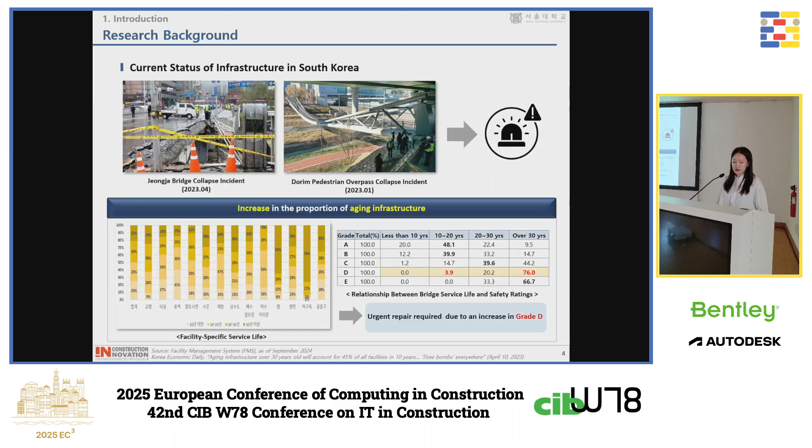As infrastructure continues to age, it is essential to understand how many facilities can be repaired within a limited budget and how much each repair will cost. However, in Korea, facilities are managed separately by different authorities and related records are fragmented. As a result, the FMS lacks a comprehensive repair cost database, making current budget estimation rough and unreliable.

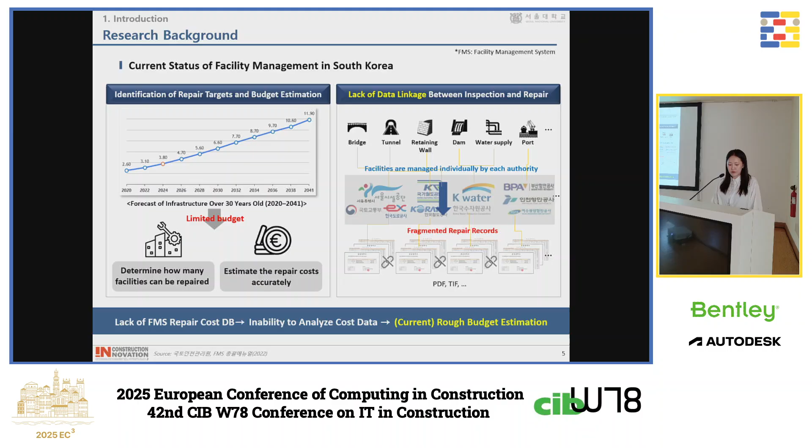To address these challenges, our research proposed three main objectives. First, we aim to establish a structured database dedicated to repair cost analysis. Second, we develop a unit cost estimation model using actual maintenance records. Finally, we aim to support accurate estimation of repair cost.

Ultimately, by improving the estimation of maintenance and repair costs, we can ensure the efficient allocation of limited public budget and contribute to the safe and sustainable management of social infrastructure.

This slide shows the overall research framework. First, we define a facility breakdown structure based on the Korea Special Act. Next, we build a database using repair records and inspection reports, linking cost and condition data. Then we develop a unit cost estimation model using the XGBoost algorithm. The model predicts cost based on facility characteristics. This approach supports more accurate and scalable cost estimation for infrastructure maintenance.

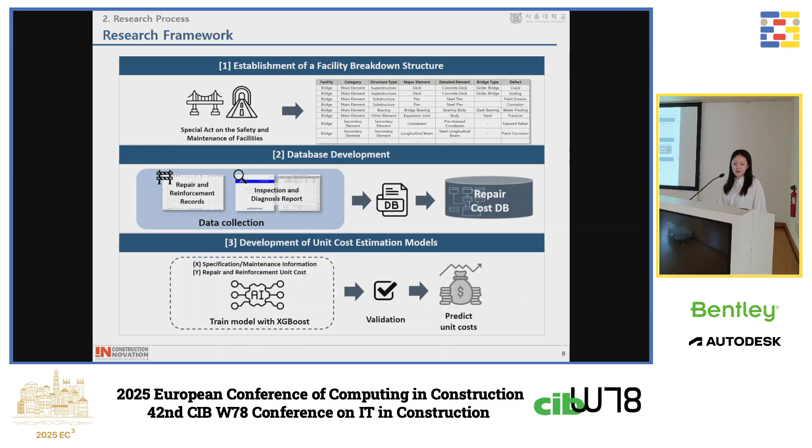Now let me explain the first step of our research framework: the establishment of a facility breakdown structure to standardize data collection. In South Korea, the Special Act on the Safety and Maintenance of Facilities classifies public infrastructure into 15 types, such as bridges, tunnels, dams, ports, and more. We select target facility types from this legal classification and examine their inspection and repair obligations. Next, we define data collection criteria based on this.

At the bottom of the slide, you can see an example of our breakdown structure. We structured the data hierarchically, starting from facility type, then category, structure type, major element, detail element, elemental type, and finally the type of defect. This breakdown system ensures the data is collected in a consistent, detailed, and comparable format.

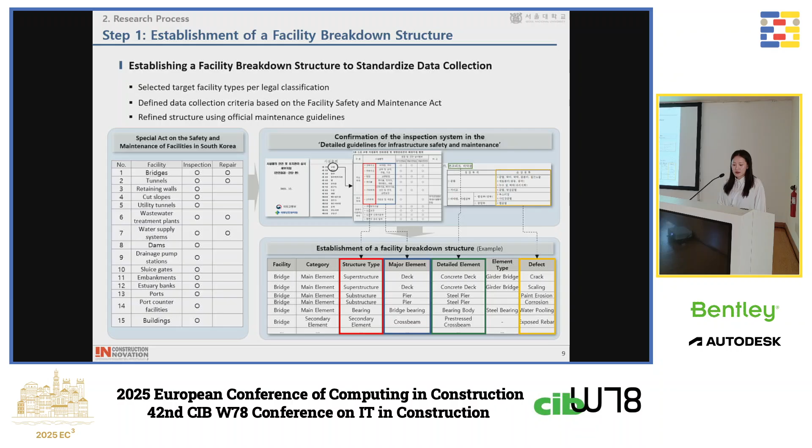Now let's move on to step 2, the development of a database using real maintenance records. To build a robust and realistic repair cost database, we first collected actual maintenance performance reports from various facility management entities in Korea, including Seoul Facilities Corporation, Korea Railroad Corporation, the Expressway Corporation, and others. These reports, which include both inspection and repair data at the facility or elemental level, were carefully reviewed.

From them, we extracted information such as defect types, repair location, and cost details, and organized everything into a structured and integrated database.

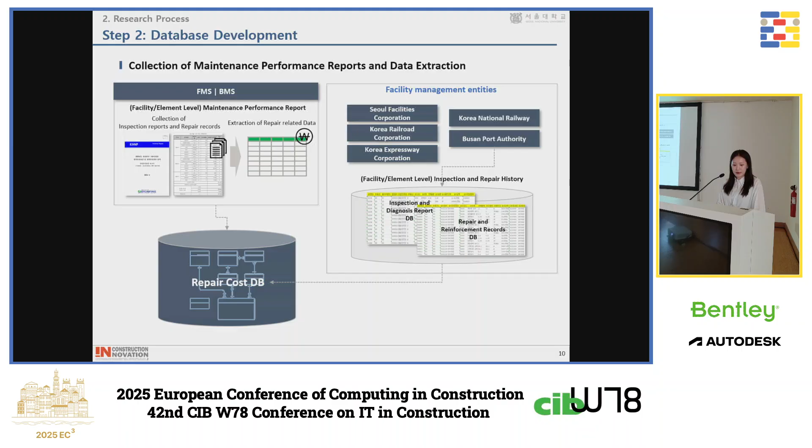This is an example of how we built the database. We extracted general information from maintenance records using sources such as the facility management system and repair history data. The extracted data includes facility type, facility name, type of work, project cost, and construction period.

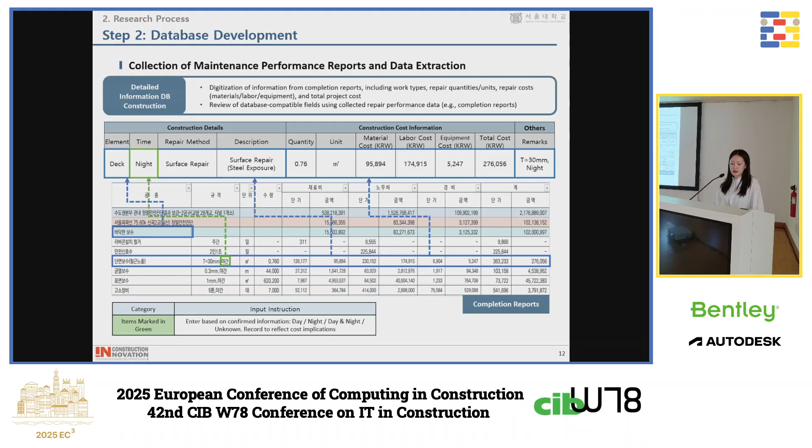We also extracted detailed information from completion reports. This includes repair method, quantities, unit cost, and total cost, such as material, labor, and equipment. By standardizing this data, we built a cost database that reflects actual maintenance practice.

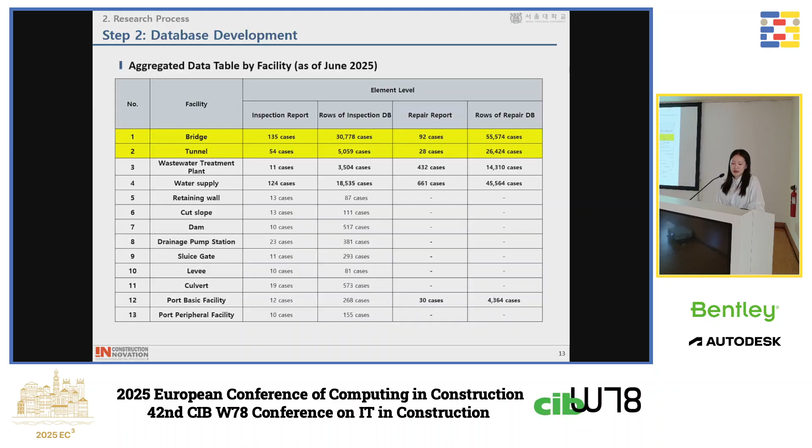This table summarizes the inspection and repair data collected by facility type. In particular, bridges and tunnels had relatively abundant data, so our analysis focused on these facility types.

Now, let me explain step 3, the development of unit cost estimation model for bridges. To build an accurate prediction model, we used the XGBoost algorithm. The model utilized 3 types of data: bridge specification information, detailed elemental level data, and actual repair records. Since repair costs vary by year, we first adjusted all cost data to present value using the National Construction Cost

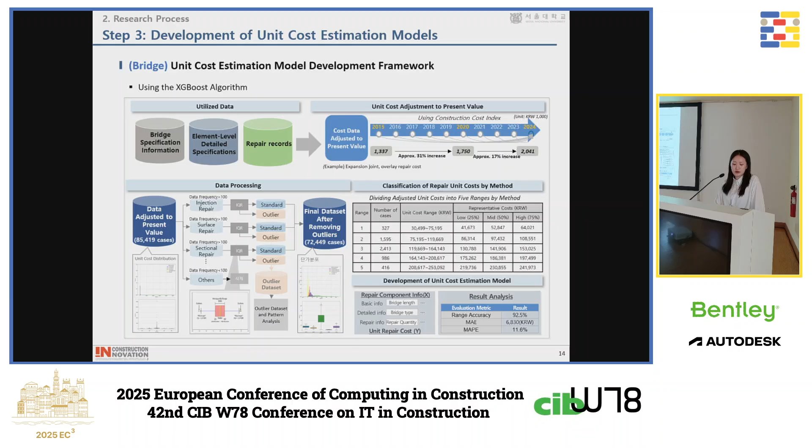Index. Next, we performed data preprocessing, which included removing outliers based on the IQR and filtering out categories with low data frequency. As a result, we secured over 72,000 valid data points for training the model. In addition, repair unit costs were classified into 5 ranges by method, such as sectional repair, surface repair, and injection repair to enhance the interpretability and accuracy of the model. Finally, we trained the XGBoost model and evaluated its performance.

In this step, we explored how the number of cost intervals affects model performance. We tested 3, 5, and 7 bins and found that models using 5 bins achieved the best overall accuracy for both surface repair and asphalt overlay method. As a result, we selected 5 intervals as a final binning strategy for cost classification. Additionally, we compared 5 classification algorithms to predict cost range. XGBoost showed the best performance across all metrics with accuracy of 91% and strong precision and recall, confirming it as the most suitable model for our task.

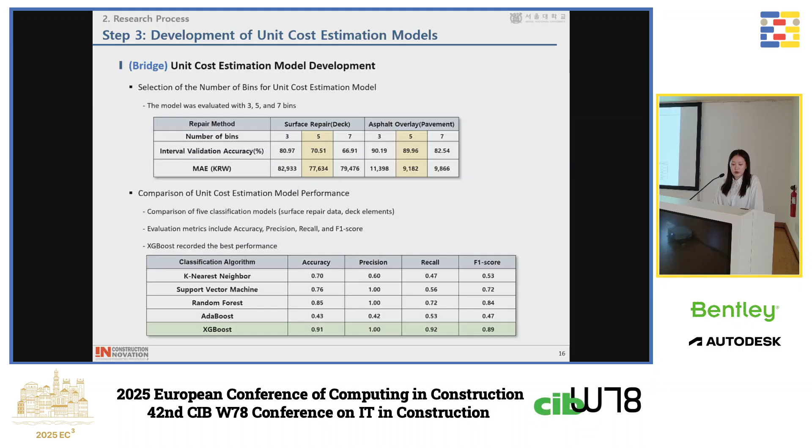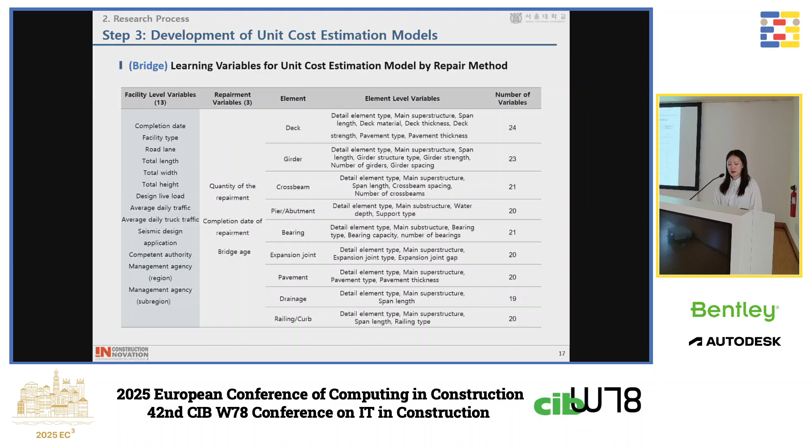To ensure accurate unit cost estimation, we use 13 facility level variables, 3 repair-related variables, and detailed elemental level information as input features for model training. The variables used are listed in this table.

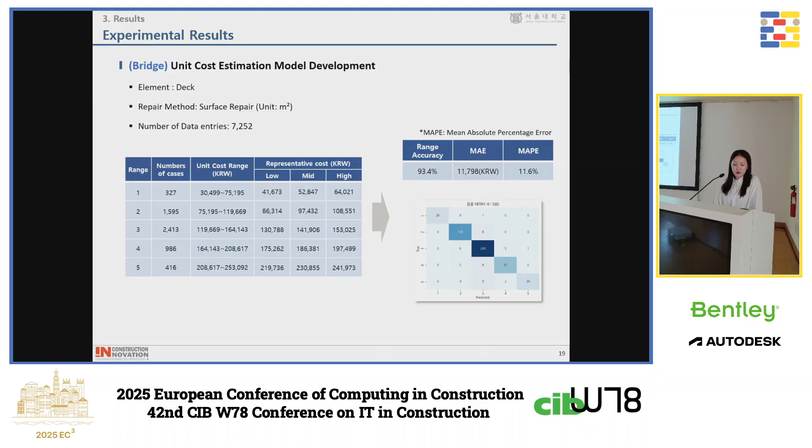Next are the experimental results. As an example, we developed a unit cost estimation model for surface repairs of deck elements. Using a total of 7,252 data entries, the unit costs were divided into 5 ranges and representative values were assigned to each range. Based on this categorization, the model was trained and achieved a range classification accuracy of 93% with a MAPE of 11%. As shown in the confusion matrix on the right, most of the predictions closely matched the actual cost range.

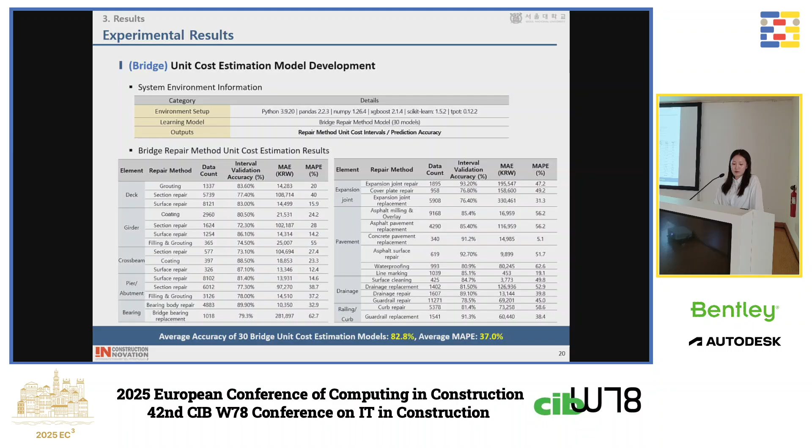Conclusion of our study. Through this research, we made 3 key contributions. First, we enable integrated management by constructing a unified repair cost database. Second, we developed an AI-based model to estimate repair cost. And third, we support more efficient cost estimation within limited budget constraints.

For future work, we plan to expand the infrastructure database with more diverse data, improve model performance by incorporating additional variables such as project scale and work duration, and enhance prediction accuracy by developing optimized models for each structure component.